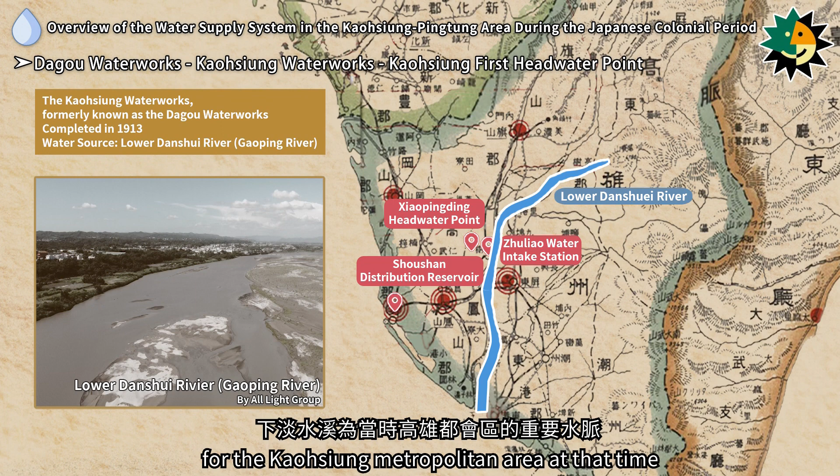The Kaohsiung First Headwater Point consisted of the Zhuliao Water Intake Station, Xiaopingding Headwater Point, and Shoushan Distribution Reservoir. This was Kaohsiung's earliest waterworks, completed in 1913, and the water was drawn from the lower Danshui River, which was an essential water source for the Kaohsiung metropolitan area at that time. The Kaohsiung First Headwater Point primarily supplied water to the urban area west of the Love River.

The Kaohsiung Second Headwater Point consisted of the Wenggongyuan Water Purification Station and the Khao Tan Distribution Reservoir, completed as an expansion in 1942. It sourced water from the underground flow of the lower Danshui River. The Kaohsiung Second Headwater Point mainly supplied water to the urban area east of the Kaohsiung River.

The Pingtung Waterworks, formerly known as the Akou Waterworks, was completed in 1917. It initially shared water sources and purification facilities with the Cishan Waterworks, drawing purified water from the Xiaopingding Headwater Point. However, due to insufficient water from the Kaohsiung First Headwater Point, a new headwater point was established on the east side of Pingtung City in 1938, including the drilling of wells and the installation of additional waterworks facilities. This allowed the Pingtung and Cishan Waterworks to operate independently.

The Chishan Waterworks was completed in 1925. Due to Japan's financial difficulties at the time, it was funded by private organizations. The water source was drawn from the Chishan Canal of the Nanzixian River and channeled into the waterworks through the canal, bringing a continuous supply of water to Chishan Township.

The Gangshan Waterworks was completed in 1925, sourcing its water from the Baijia Canal of the Agongdian River. In 1937, an elevated water tower was added, which became a landmark in Taiwan's architectural history.

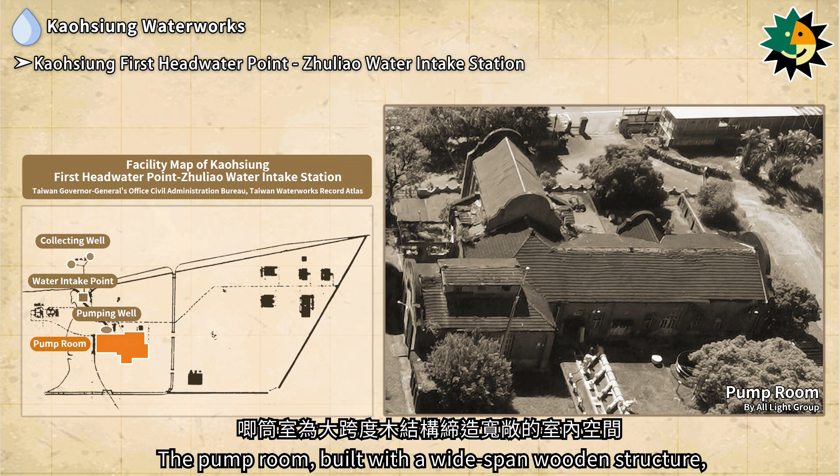The Zhuliao Water Intake Station, originally named the Dagou Waterworks Pump Room, was completed in 1913. The station included a collecting well, water intake point, pumping well, and pump room. The pump room, built with a wide-span wooden structure, provided a spacious interior equipped with modern power-driven pumps.

In 1998, it was designated as a Grade 3 historical site by the Ministry of the Interior, and it is now a municipal monument in Kaohsiung City.

The Xiaopingding Headwater Point, located in Xiaopingding, Dashu Village, was completed in 1913. The site included facilities such as a distribution well, sedimentation tank, sedimentation well, sand filter, sand filtration well, water conveyance well, and sand washing area.

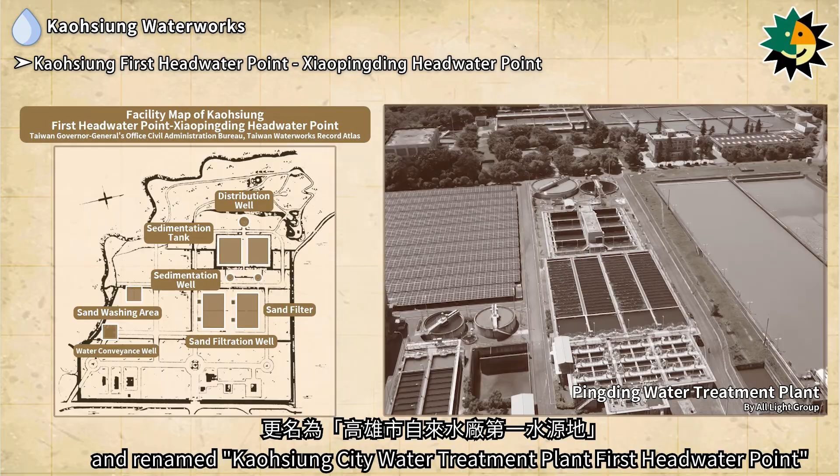After the retrocession of Taiwan, the site was taken over by the Kaohsiung City government and renamed Kaohsiung City Water Treatment Plant First Headwater Point. Covering an area of about 25 hectares, it was renamed the Pingding Water Purification Station in 1974 and integrated into the Taiwan Water Corporation as one of the 6 purification stations serving the greater Kaohsiung area.

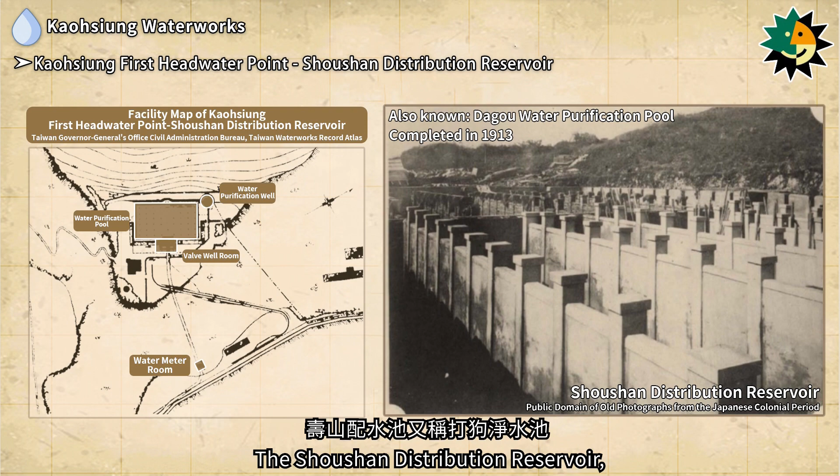The Shoushan Distribution Reservoir, also known as the Dagou Water Purification Pool, was completed in 1913. The reservoir housed facilities such as a water purification well, water purification pool, valve well room, and water meter room.

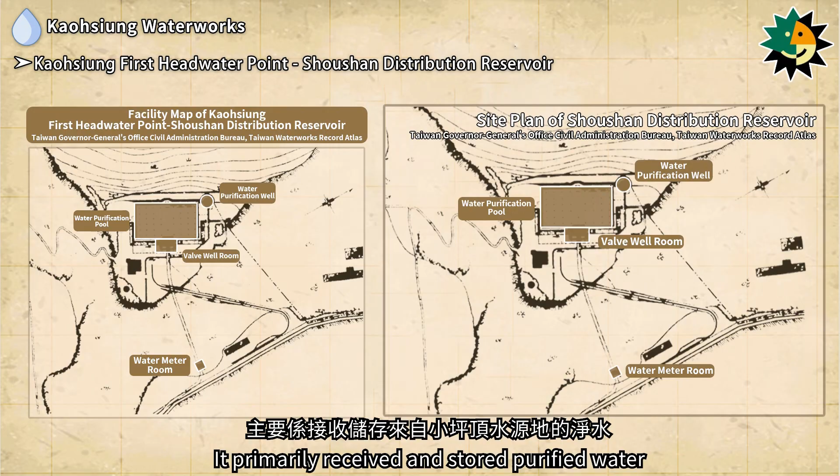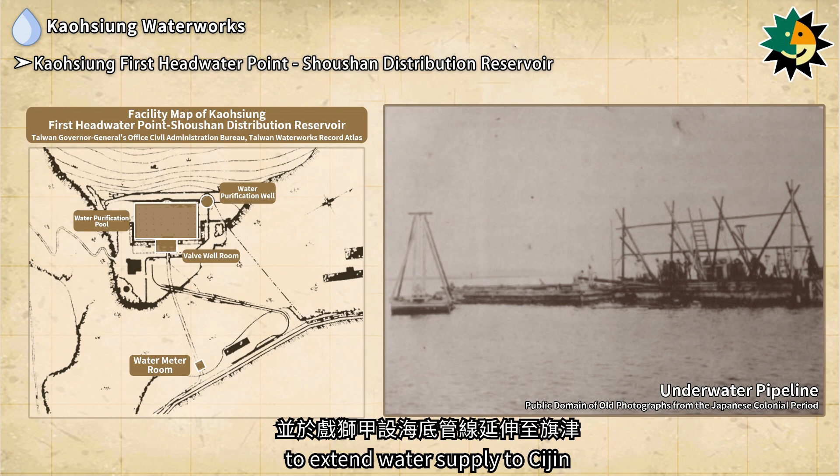It primarily received and stored purified water from the Xiaopingding headwater point, which flowed through the valve well room to the water meter room at the foot of the mountain and distributed water to the urban area. Additionally, an underwater pipeline was laid at Xishijia to extend water supply to Cijin and provide water to the urban area of Qihou.

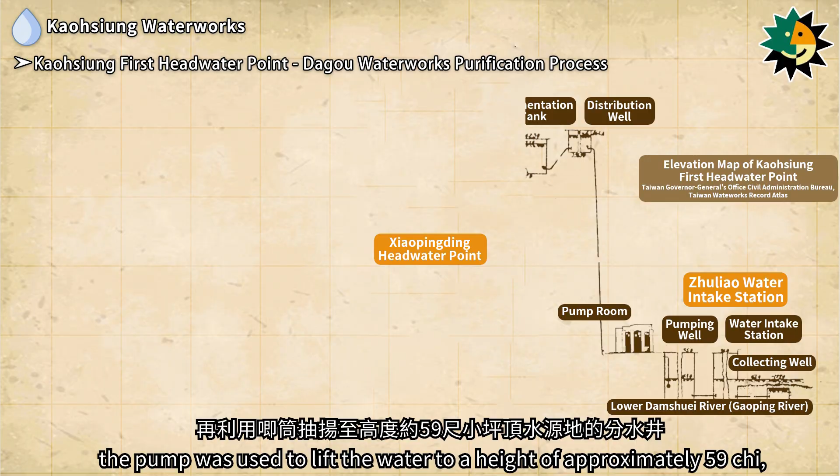The purification process at the Kaohsiung First Headwater Point began by collecting raw water from the lower Damshui River into a collecting well at the water intake station. After water was drawn through the water intake point and into the pump well, the pump was used to lift the water to a height of approximately 59 chi, where it reached the distribution well at the Xiaopingding headwater point. After undergoing sedimentation, filtration, and disinfection, the clean water was first collected in the conveyance well.

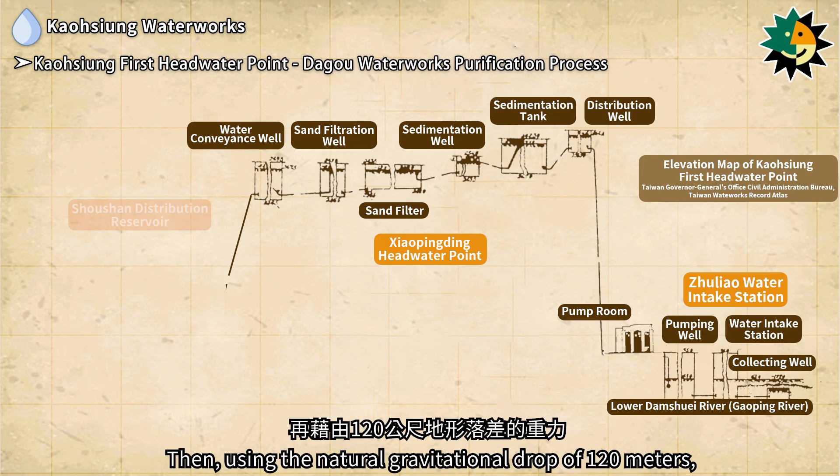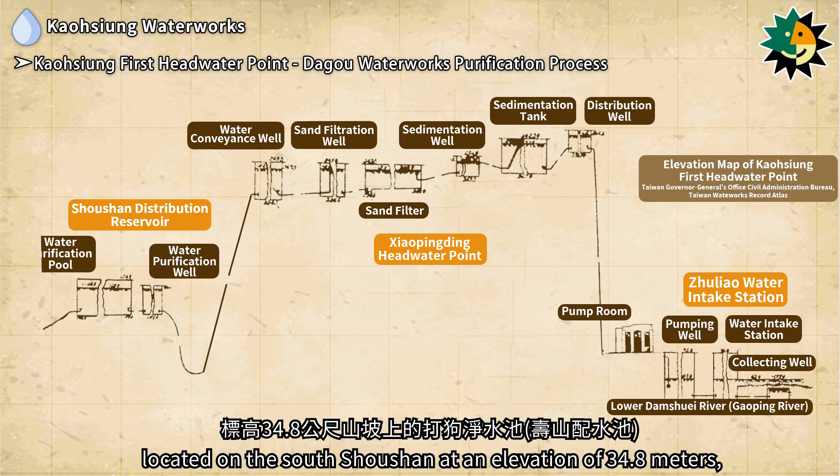Using the natural gravitational drop of 120 meters, the purified water was transported to the Dagou Water Purification Pool located on the South Shoushan at an elevation of 34.8 meters, supplying water to Dagou Port and the urban area. As factories and heavy industries rapidly developed in the Kaohsiung area, the demand for water significantly increased.

In 1942, the second headwater point was established in Wengongyuan, Daliao village, to collect groundwater using collecting wells. Additional facilities such as aeration basins and sand filters were installed, and a distribution reservoir was built on the hills of Kaohtan and Daliao to supply water primarily to the areas east of the Kaohsiung River.

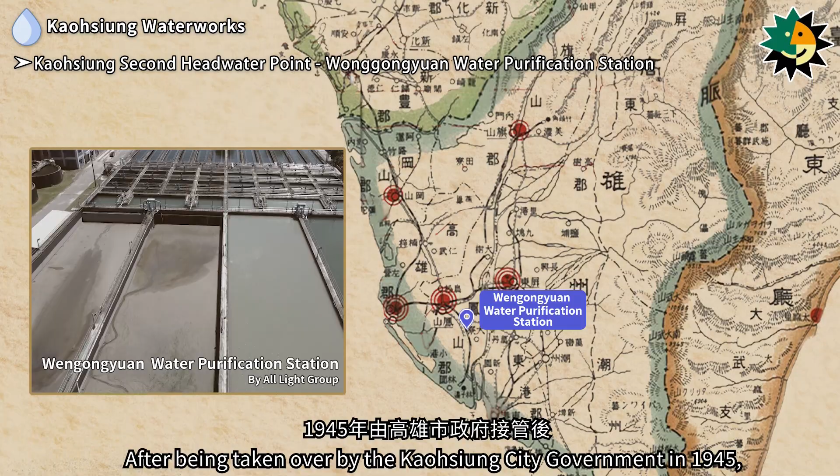The Wengongyuan water purification station, located in Daliao village, was completed in 1942, with a designed output of 8,350 cubic meters per day, capable of serving 50,000 people. After being taken over by the Kaohsiung city government in 1945, the plant underwent continuous improvements and expansions, and it now has a designed output of 36,000 cubic meters per day.

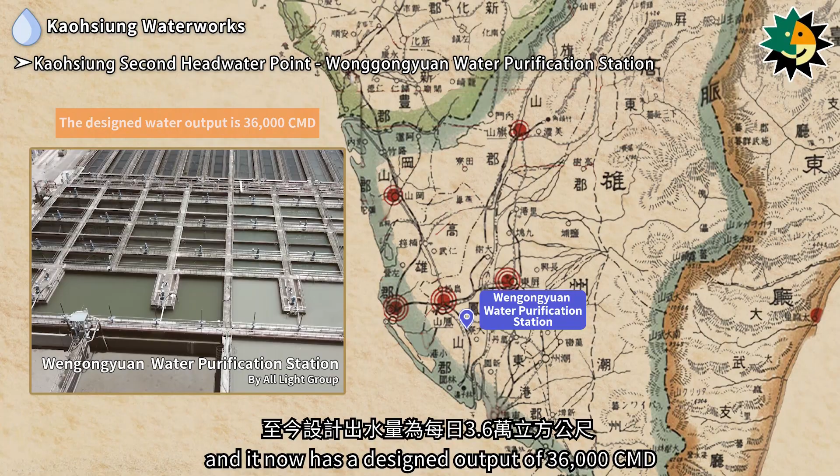The Kaohtan Distribution Reservoir, located on the hills of Kaohtan and Daliao, was completed in 1942. It primarily distributed purified water from the Wengongyuan water purification station to the Kaohsiung area. After the completion of the Kaohtan water treatment plant in 1972, the distribution reservoir was decommissioned and no longer used.

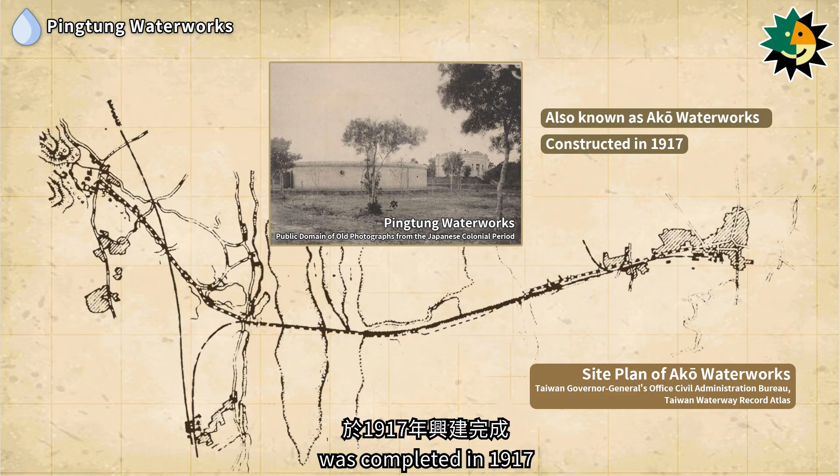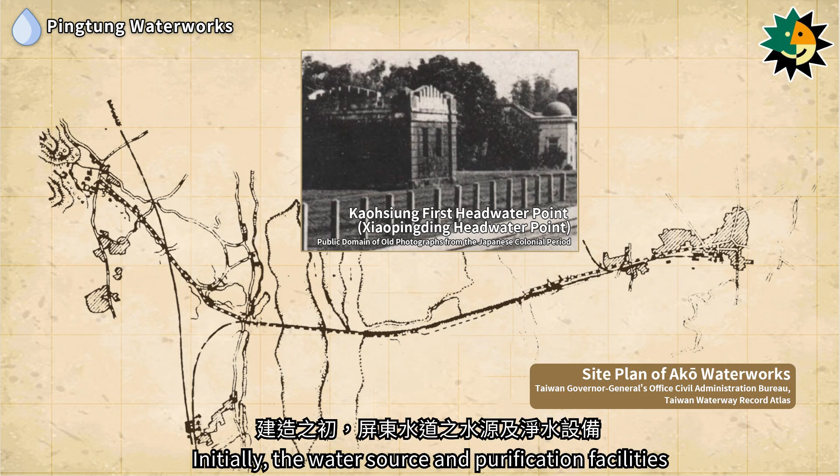The Pingtung Waterworks, also known as the Akō Waterworks, was completed in 1917. Its purpose was to meet the local residents' water needs and improve environmental sanitation. Initially, the water source and purification facilities of the Pingtung Waterworks were shared with the Kaohsiung First Headwater Point.

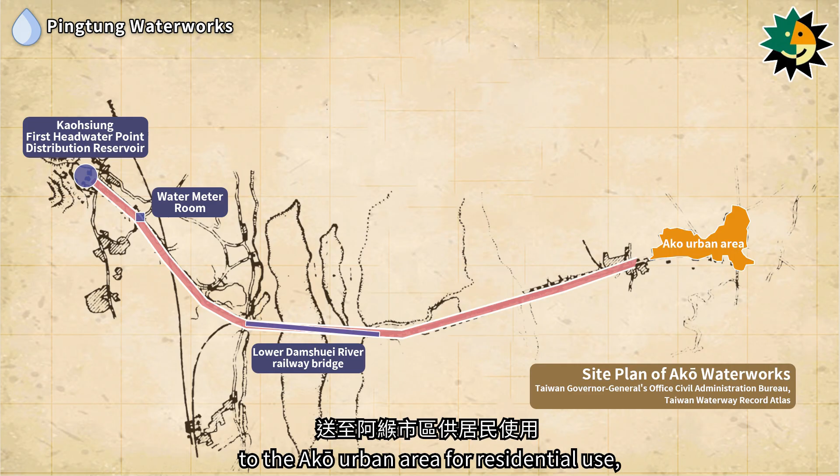After the water was filtered at the Xiaopingding Headwater Point, it was transported via the Akō Waterworks water meter room and the lower Damshuei River Railway Bridge to the Akō urban area for residential use, with a planned supply for 15,000 people. As Pingtung's population grew and the water supply from the Kaohsiung First Headwater Point became insufficient, a new headwater point was sought for the Pingtung Waterworks in 1934.

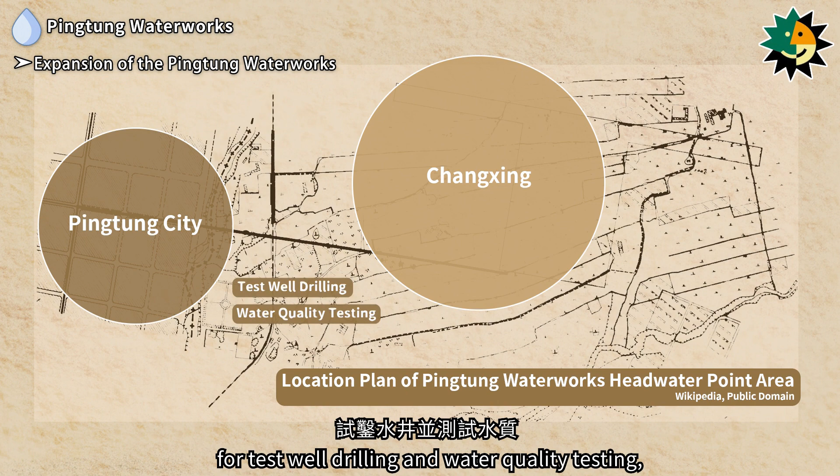The eastern side of Pingtung City, in the Changxing Area, was selected for test well drilling and water quality testing, which revealed that the groundwater was both high quality and abundant. Thus, in 1936, Changxing was established as the new headwater point, and the expansion of the Pingtung Waterworks was completed in 1938, allowing the Pingtung Waterworks to operate independently from the Kaohsiung First Headwater Point.

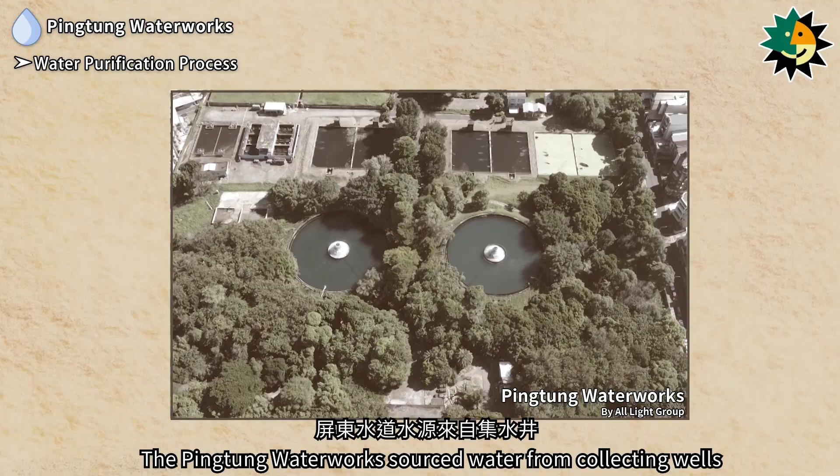The Pingtung Waterworks sourced water from collecting wells. The raw water passed through aeration basins and flowed into sand filters for purification. After filtration, the water was pumped from the pumping well to a distribution tower 30 meters high. The purified water then naturally flowed downward by gravity to supply 45,000 residents in the Pingtung urban area.

The Cishan Waterworks was built in 1925. Due to financial difficulties following the 1923 Great Kanto earthquake, the Cishan Waterworks was initially funded by private investment.

The Cishan Credit Union signed a water supply agreement with the Irrigation Association, where the credit union was responsible for constructing the waterworks facilities and the Irrigation Association provided the water from the Cishan Canal of the Nanzixian River. Once the waterworks were completed, ownership of the facilities was transferred to the Irrigation Association, which paid a usage fee to the credit union. The Cishan Waterworks was the earliest modern water supply system built in Kaohsiung County at that time.

In 1929, due to the Irrigation Association's unstable water supply and the credit union's insufficient financial resources, the local government purchased the Cishan Waterworks system and made improvements using public funds. A water purification pool was added in 1930.

After 1945, as the population of Cishan increased and the Cishan Canal began to experience reduced water flow due to poor maintenance, the facilities gradually became insufficient to meet demand. In 1954, a new water intake point was established at the Cishan embankment, and an 850 cubic meter water reservoir was added at the foothills of Zhongshan Park.

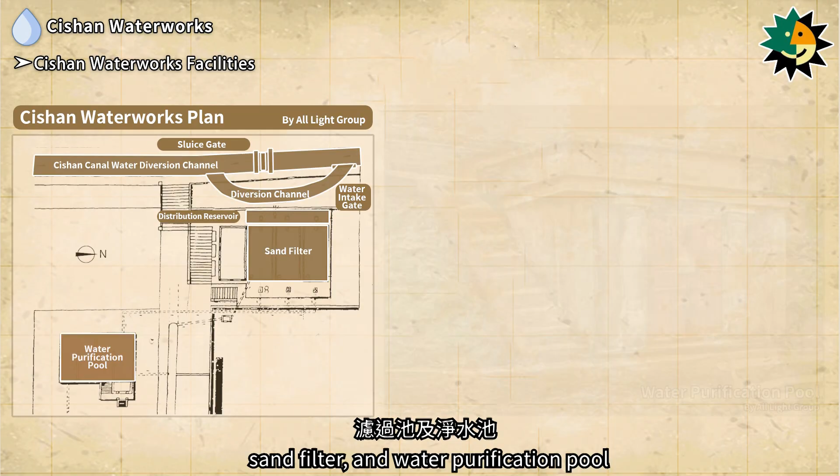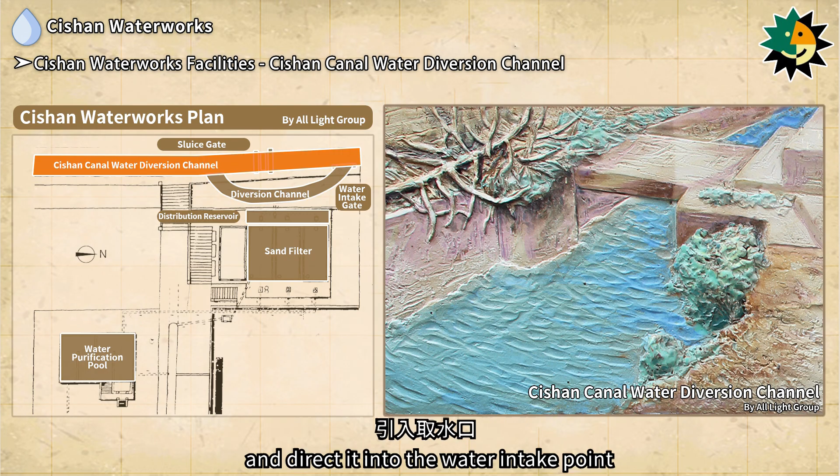The Cishan Waterworks facilities included the Cishan Canal water diversion channel, sand filter, and water purification pool. The Cishan Canal was the source of water for the Cishan Waterworks. The water diversion channel was inverted trapezoidal, with a sluice gate installed at the top to block the water and direct it into the water intake point.

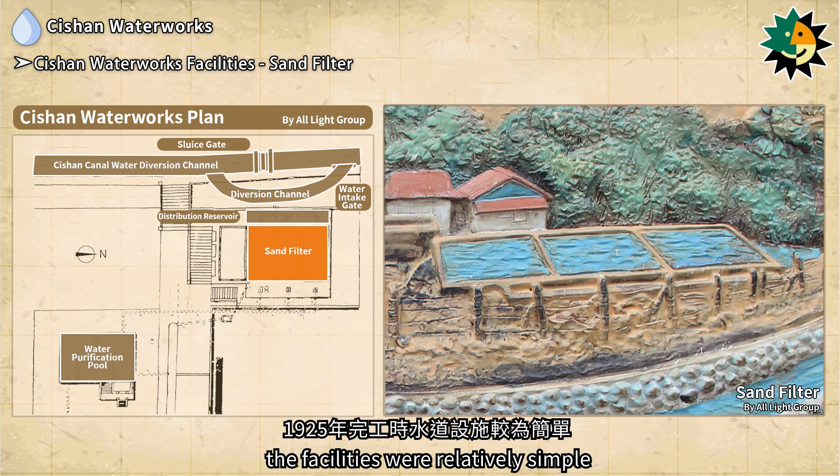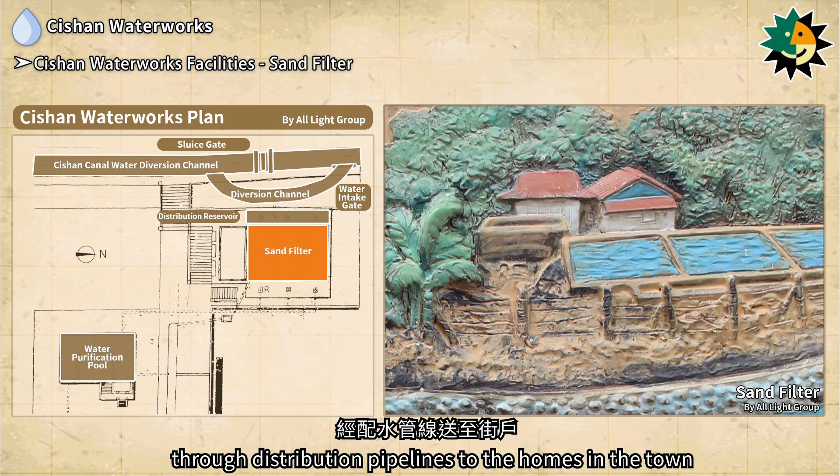The sand filter was made of reinforced concrete. When the waterworks were completed in 1925, the facilities were relatively simple. Water from the canal was filtered, and the natural water level difference was used to send water through distribution pipelines to the homes in the town. Initially, the Cishan Waterworks did not include a water purification pool.

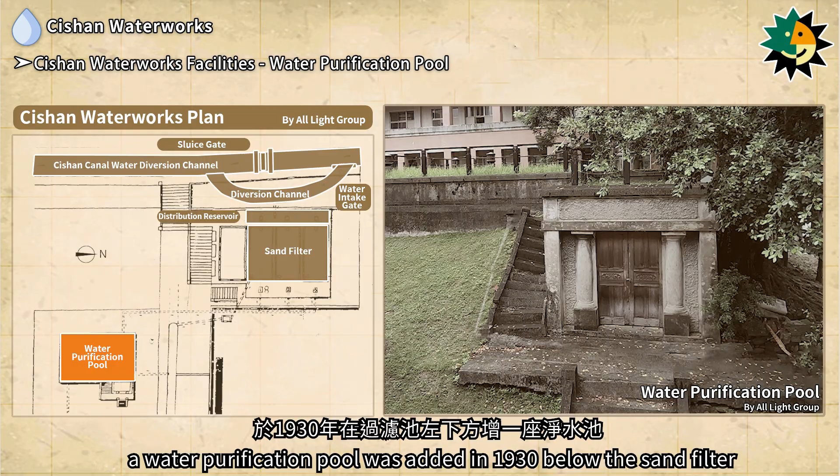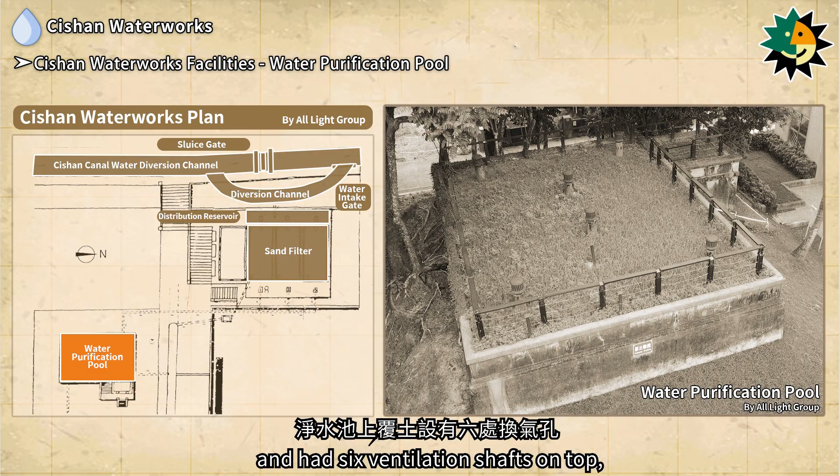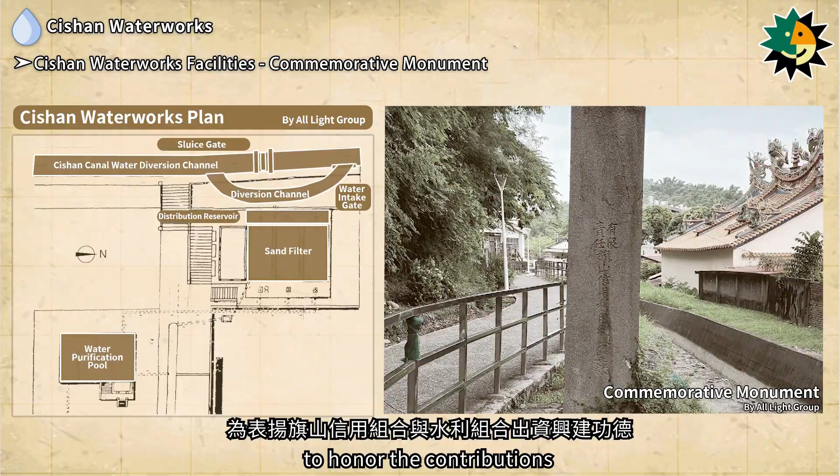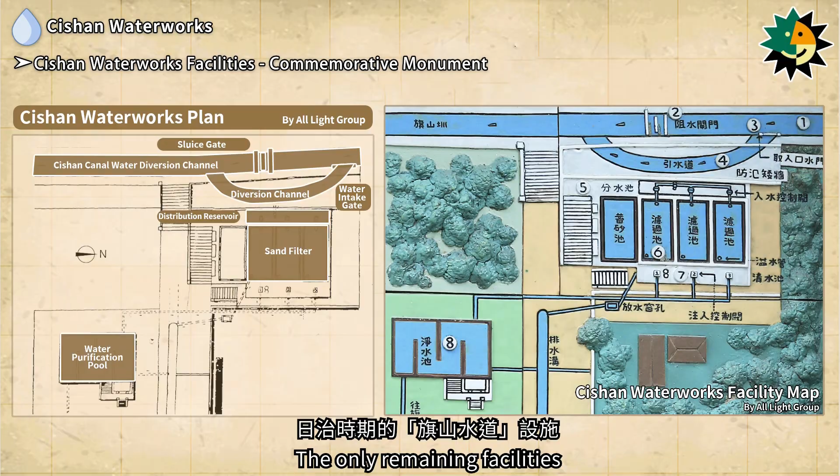After the government acquired and upgraded the waterworks in 1929, a water purification pool was added in 1930 below the sand filter to improve water quality. The water purification pool was covered with soil and had 6 ventilation shafts on top, along with a front chamber at the entrance. The commemorative monument was erected in 1925 after the completion of the Cishan Waterworks to honor the contributions of the Cishan Credit Union and Irrigation Associations, whose investments made a lasting impact on the economic development of Cishan. The only remaining facilities from the Japanese colonial period Cishan Waterworks are the Cishan Canal Sluice Gate, the water diversion channel, the water purification pool, and the commemorative monument.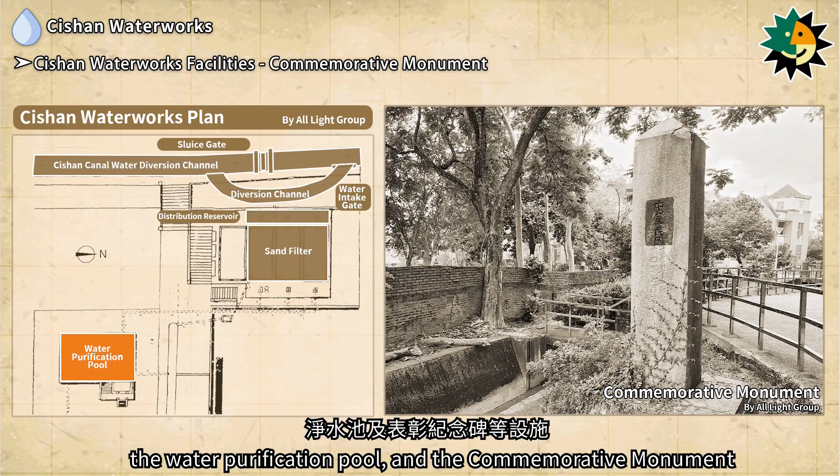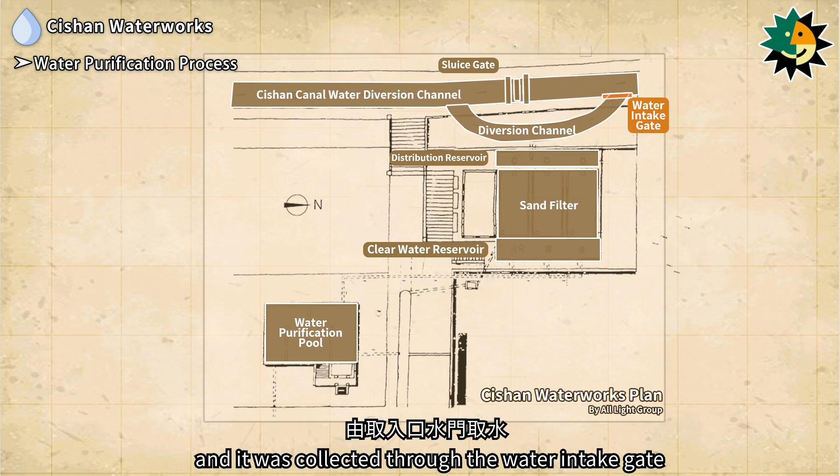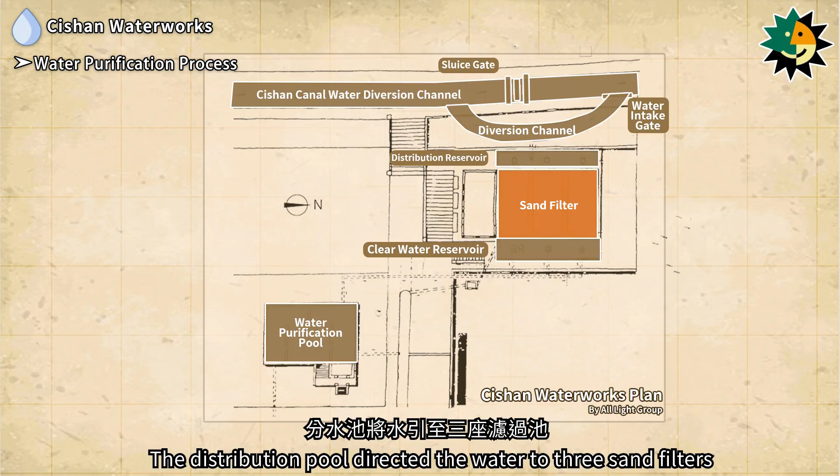The water purification process of the Cishan Waterworks began by diverting water from the Cishan Canal. The sluice gate blocked the water, and it was collected through the water intake gate. The water was then channeled through the diversion channel into the distribution reservoir, where sand could be washed if necessary. The distribution pool directed the water to 3 sand filters. After filtration, the water was sent to the clear water reservoir, which then transported the water to the purification pool for storage. From there, the purified water was distributed through pipelines to the urban area for residential use.

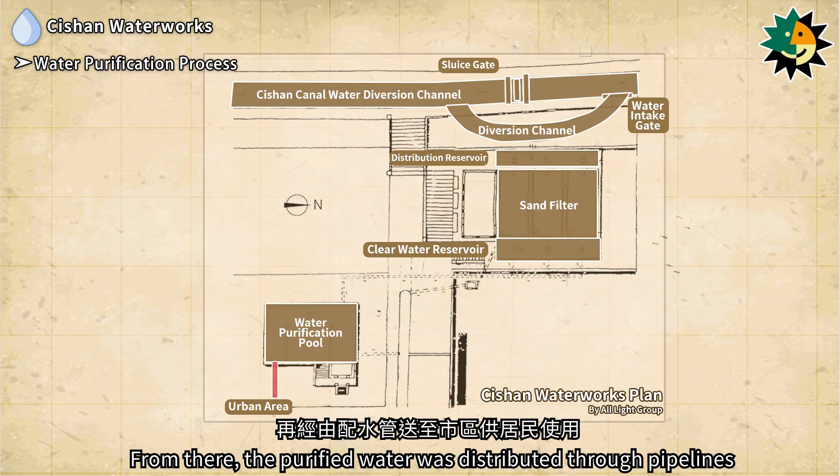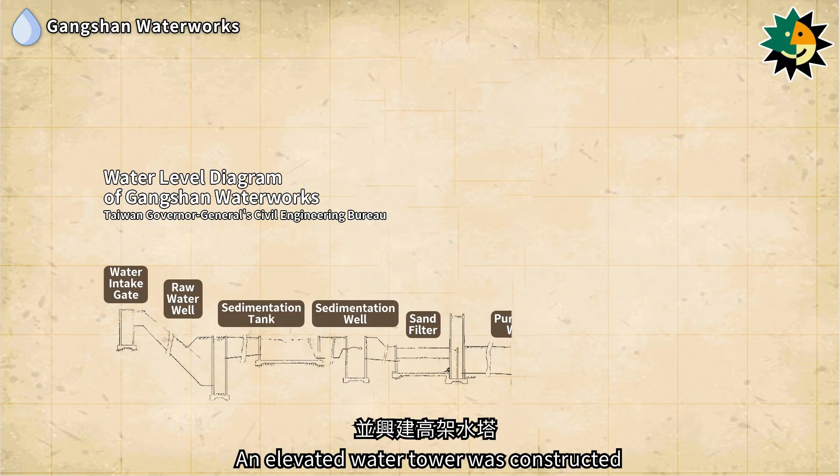The Gangshan Waterworks was built in 1925, with its water source drawn from the Baijia Canal of the Agongdian River. Initially, it was a simple waterworks system, but as the population in Gangshan Street grew, an expansion project took place between 1937 and 1938. An elevated water tower was constructed to provide pressurized water distribution, supplying municipal water for 7,000 people in the Gangshan area.

Subsequent expansion projects for the Gangshan Water Purification Station were carried out in 1957 and 1962. During these phases, the slow sand filter was replaced with a rapid sand filter, and a pump room was built to replace the function of the water tower for pressurization. The Gangshan Water Tower was converted into a high-pressure backwash system for the rapid sand filter.

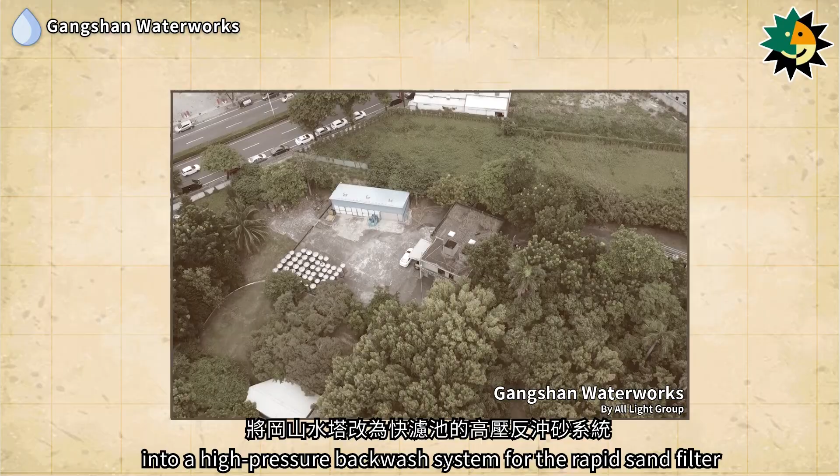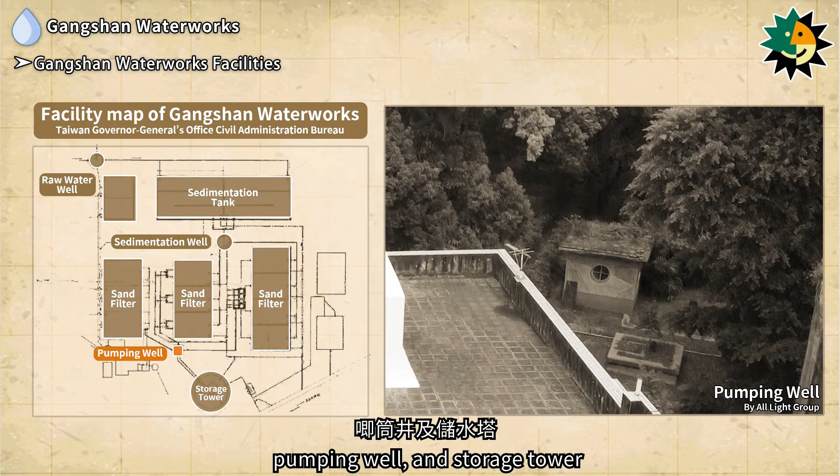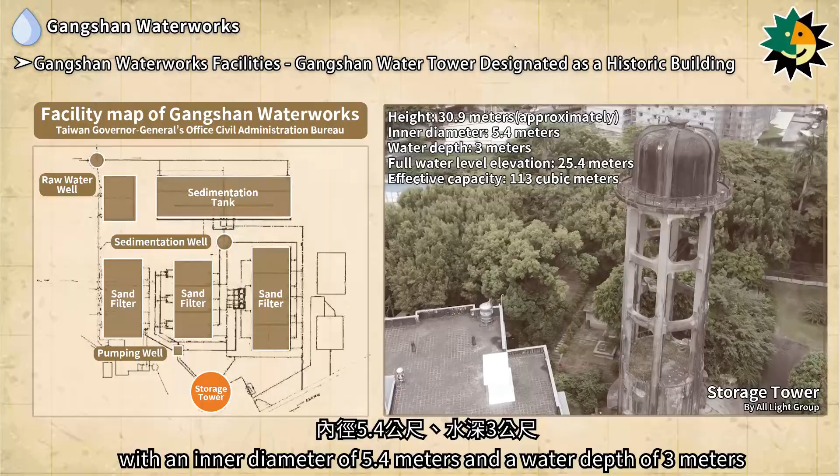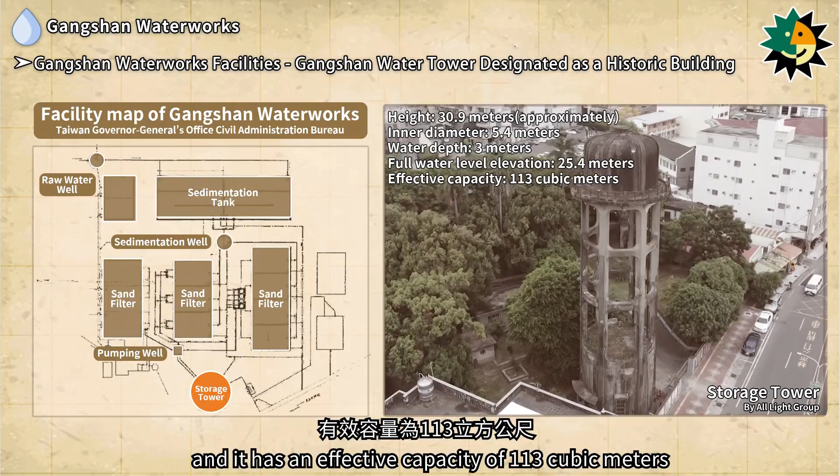The Gangshan Waterworks facilities included a raw water well, sedimentation tank, sedimentation well, sand filter, pumping well, and storage tower. The Gangshan Water Tower is a reinforced concrete structure, approximately 30.9 meters high with an inner diameter of 5.4 meters and a water depth of 3 meters. Its full water level reaches an elevation of 25.4 meters, and it has an effective capacity of 113 cubic meters. The tower contains a water level gauge, and the main structure remains intact.

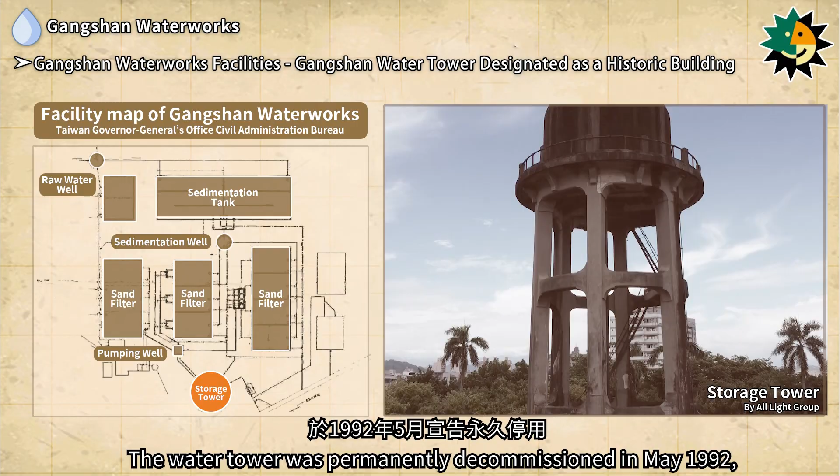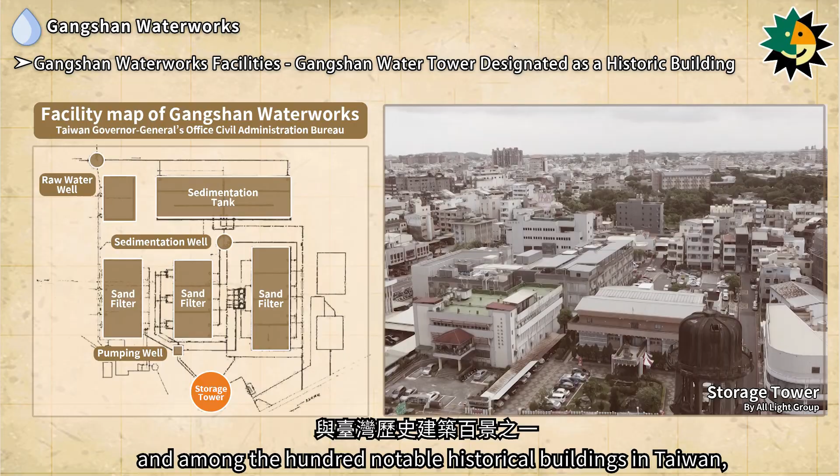The water tower was permanently decommissioned in May 1992, and in 2004, it was declared a historic building. It is one of the top 10 historical buildings in Kaohsiung County and among the 100 notable historical buildings in Taiwan, serving as an important landmark in the Kaohsiung area.

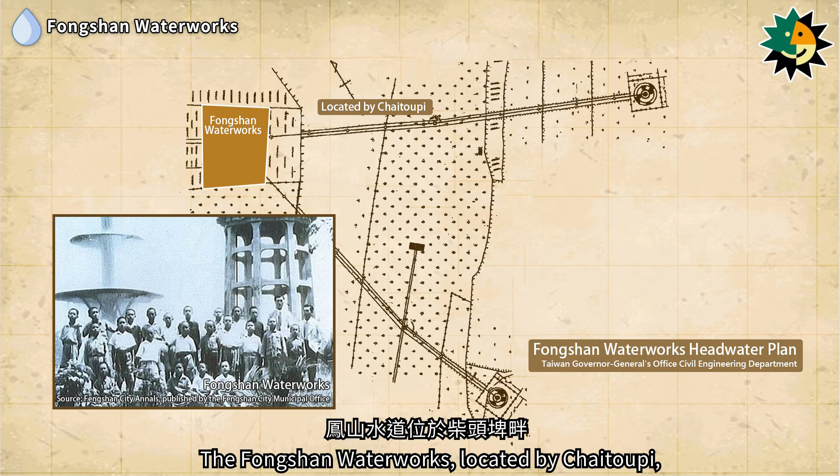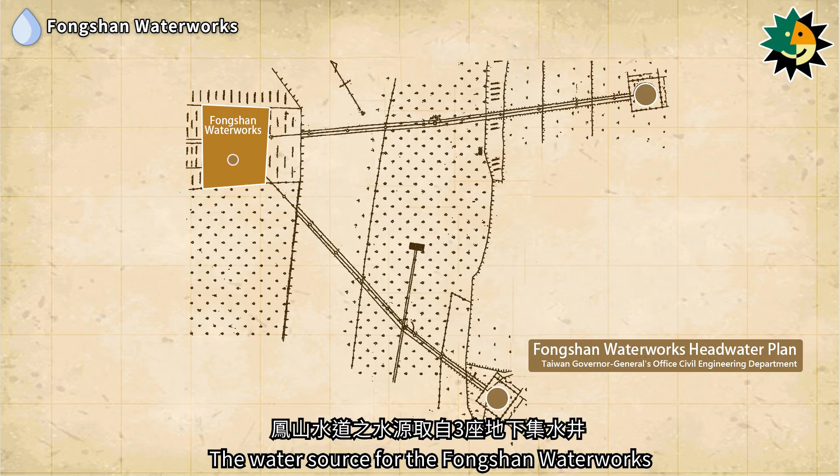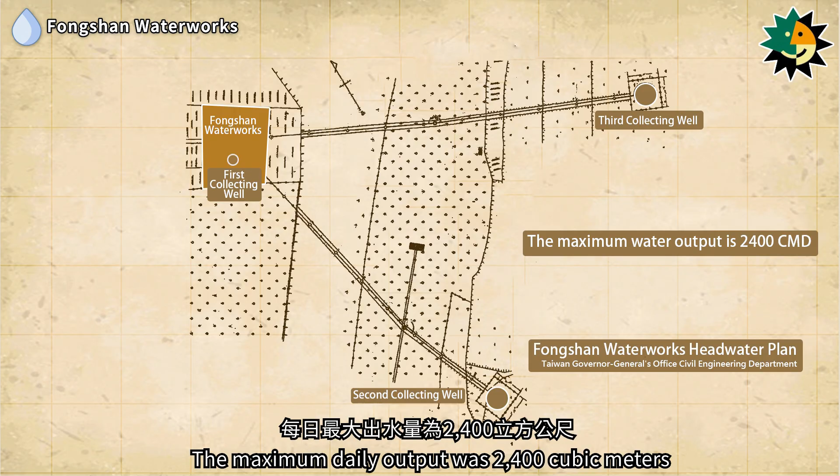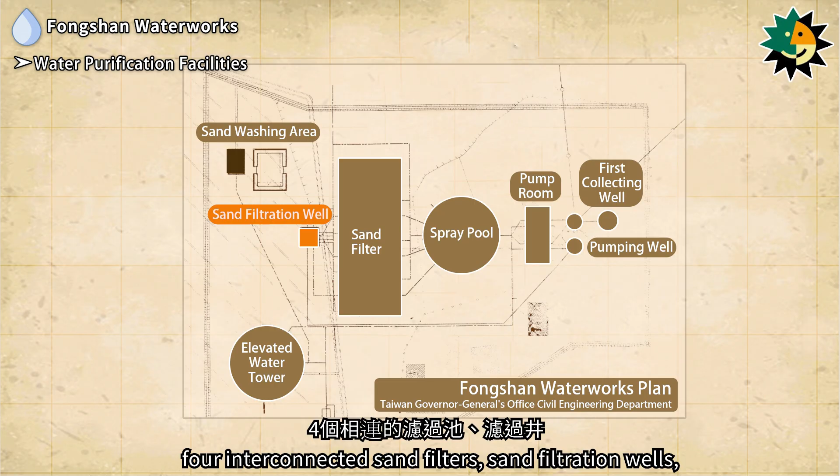The Fongshan Waterworks, located by Chaitoupi, began construction in December 1933 and was completed in October 1934, taking only 11 months. The water source for the Fongshan Waterworks came from 3 underground collecting wells, 1 at the headwater point and 2 at Chaitoupi. The maximum daily output was 2,400 cubic meters. The Gangshan Waterworks facilities included collecting wells, a pumping well, a pump room, a spray pool, four interconnected sand filters, sand filtration wells, a sand washing area, and an elevated water tower.

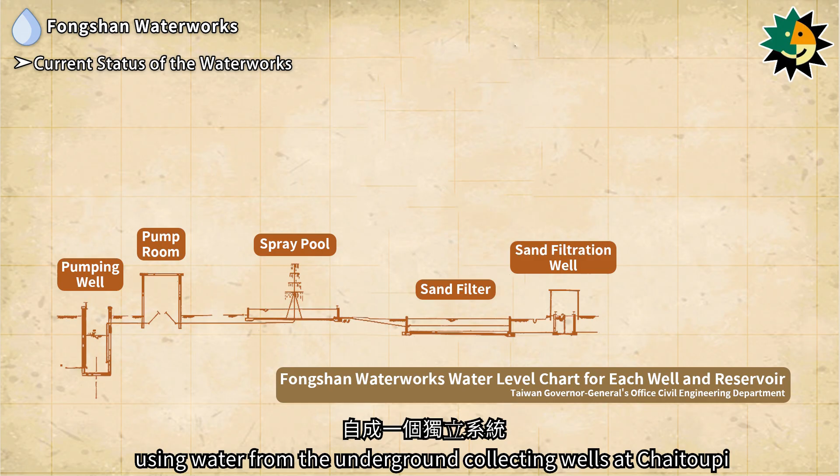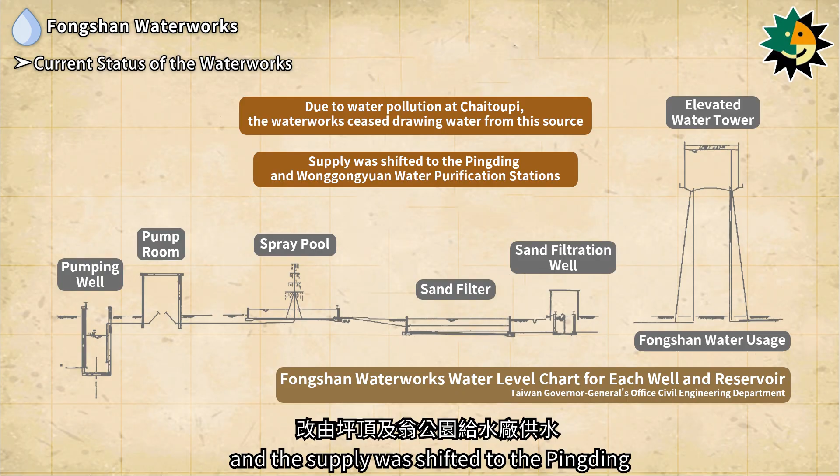The Fongshan Waterworks originally functioned as an independent system using water from the underground collecting wells at Chaitoupi. In 1972, due to water pollution at Chaitoupi, the waterworks ceased drawing water from this source, and the supply was shifted to the Pingding and Wonggongyuan water purification stations. The aeration tower was dismantled in 1984. The land containing the Chaitoupi headwater point, sedimentation tank, aeration tower, sand filters, and collecting wells was returned to the Fongshan City Office in 1973.

The reclaimed land has since been redeveloped into congregate housing. Currently, only the office area of the Fongshan Service Center remains, with the site area reduced from 1.2 hectares to 0.19 hectares. The elevated water tower of the Fongshan Waterworks was once a landmark of Fongshan and a shared memory of the older generation. However, after being damaged by the 9/21 earthquake in 1999, the tower was dismantled in 2000 for safety reasons and replaced by a parking lot.

The construction of waterworks in the Kaohsiung Pingtung area during the Japanese colonial period effectively addressed the issues of unclean drinking water and poor sanitary conditions, which had led to epidemics. These waterworks laid a critical foundation for the development of the region. Starting in 1909, the Taiwan Governor General's Office successively built the Kaohsiung Waterworks, Pingtung Waterworks, Qishan Waterworks, Gangshan Waterworks, and Fongshan Waterworks. These structures were grand and meticulously designed, and despite over a century of history, they still retain their original splendor, holding a special place in the memories of local residents.

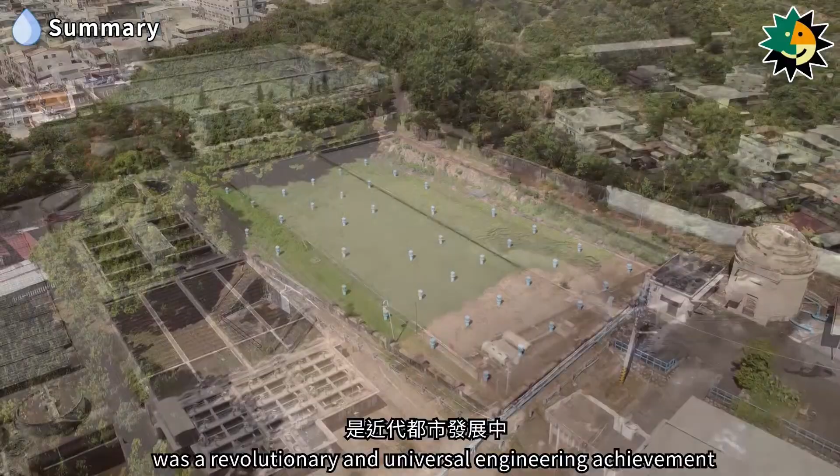The construction of waterworks was a revolutionary and universal engineering achievement in the development of modern cities, and the topic of public water supply is one worthy of deep exploration. As we enjoy the benefits of clean water today, we are reminded to honor the efforts and contributions of those who came before us, whose work continues to inspire gratitude and admiration.